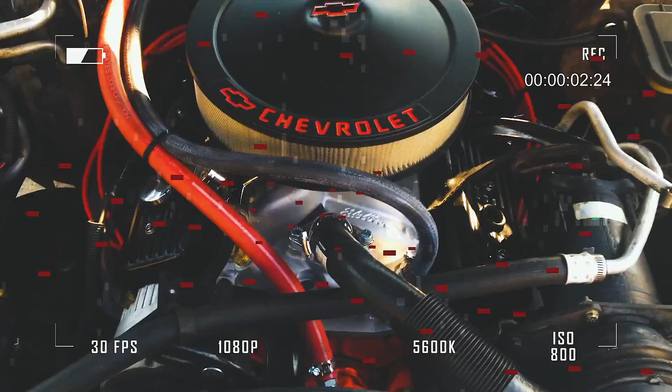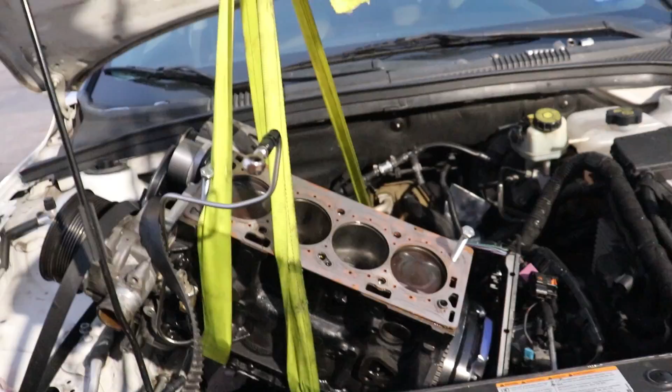We're working on getting the engine out currently. So let's go ahead and pull this out, and we'll toss our new Big Bang kind of budget built thing back on in place.

Whew, man, it's gonna be one of those late nights. I've got the engine on the stand, old engine out. There she is. We'll get her all sorted here in the future.

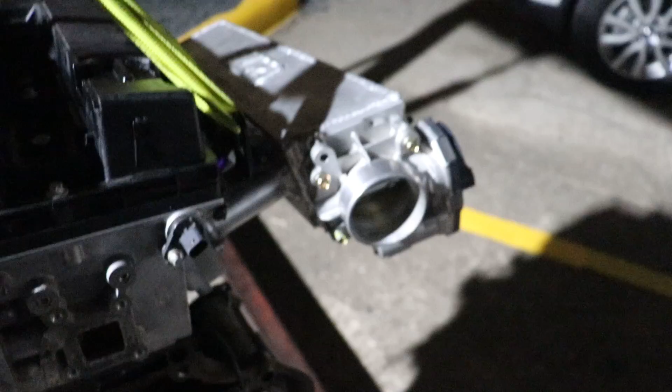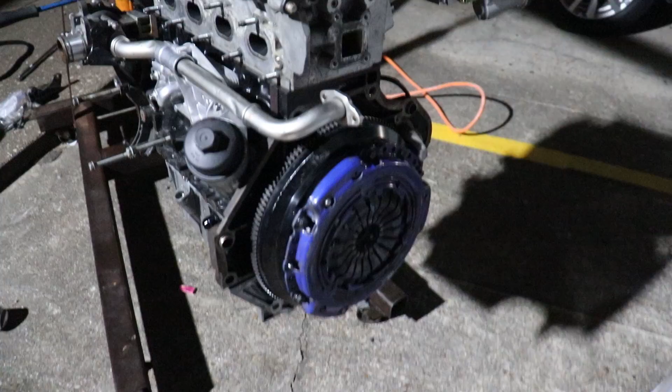We've got our manifold on along with our throttle body. Next thing I need to do is toss the flywheel and clutch on, and then we'll toss it in the car. Got our flywheel on, our clutch and pressure plate. Let's stab it on in.

Well, I got a handful of bolts bolted up to the engine. She is in there. Got our front mount, just kind of hold the front of the engine. Couple bolts where the dowels are at.

Still need to get the old block off the ground onto the engine stand and pull all this stuff in so I can call it a night. So we'll just have to pick it up tomorrow and we'll finish buttoning things up over the weekend. We'll see you then.

Ooh-wee. Starting the day off right. Man, nothing like busting yourself up working on some cars.

It is the next day. It is beautiful outside. We've got the engine in, the blocks all bolted up, and we've just got all the little small things that we need to take care of. I'll show you what those are.

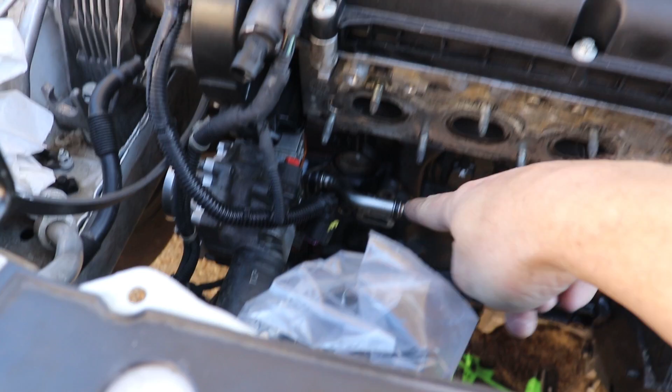One of the first things I need to do is hook up the oil feed. So I got the oil cooler out of the way. We'll hook the oil feed up.

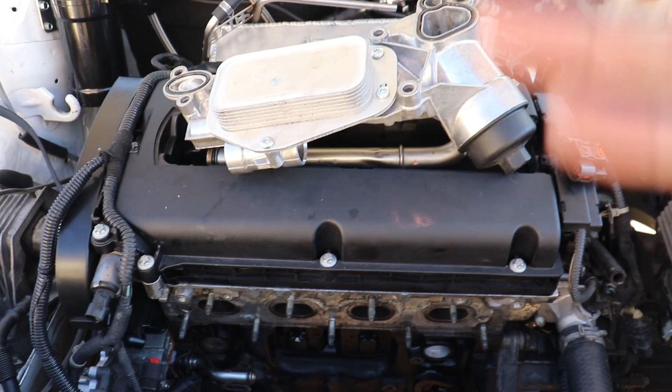I think I'm gonna have to replace the starter that came on this engine because the connections on it just aren't great. I'm gonna put my starter in it because I know it's good.

We'll toss some oil in it, take this cam cover off, we'll turn it over, make sure we're getting oil feeding through to the turbo, get oil through the system, up to the top where the camshafts are.

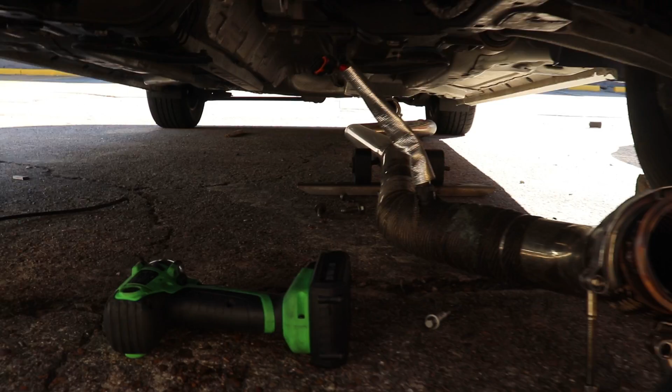Once we get that done, we'll get our fuel all hooked back up. We'll get our plumbing for the coolant, all that situated. Still need to bolt up my AC compressor, put all my accessories, plastics on, and we need to toss this exhaust back on as well. Not to mention turbo manifold, the turbo, hook up our intercooler piping, which is gonna be pretty easy. Aside from that, man, we're ready to rock and roll.

So let's get after it. I'm just gonna knock this stuff out and I'll check back in with you guys.

We've got oil coming out of the turbo feed. We got oil going to the top of the engine. So all we need to do now is toss on our valve cover or cam cover, put on our manifold. I've already got the exhaust hooked up. I just need to put the down pipe on, hook up the charge pipe, and we're good. We've got the fuel already hooked up. I mean, it's disconnected at the moment, but we're almost there.

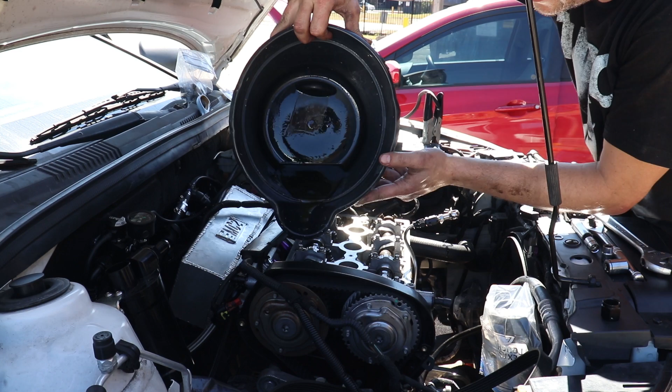Ooh-wee. Looking good. Pour this stuff back in.

Sun up, sun down, we got the engine 99.9% complete. I've had the chance to work on it all day with minimal interruptions, although what interruptions I've had today were pleasant. However, let's take a look at this.

I'll show you what's left to be done. We're going to write a startup tune to it, and we're gonna pop this thing off.

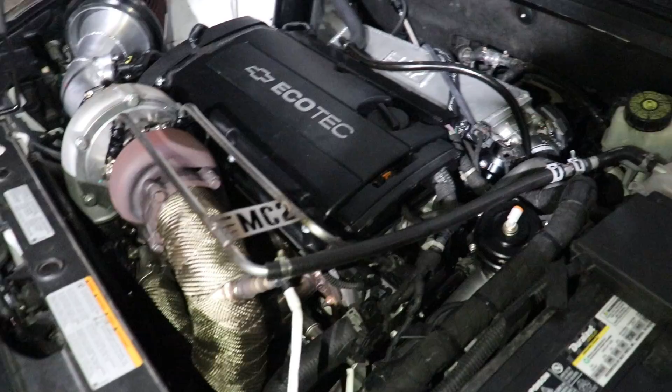So obviously I still need to put my turbo blanket on, or for the exhaust side, turbine side, whatever you want to call it. And I do have this one vacuum line over here that I need to route to the blow-off valve, but that's okay. All I want to do is fire the thing up, see if we've got any leaks.

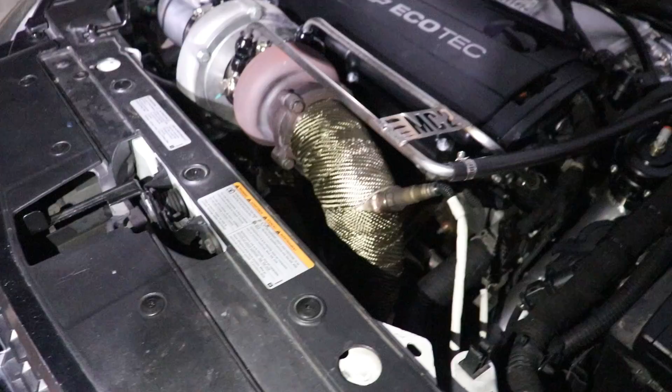We may get some leaks from these fittings here. I wasn't able to find any brass, copper fitting silly things, I forget what they're called. Been a long day, but we've got it hooked up.

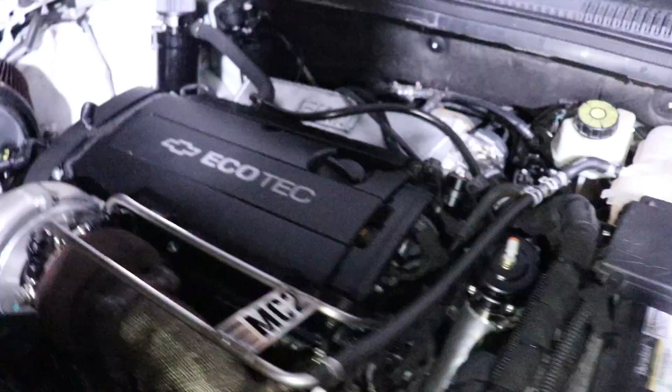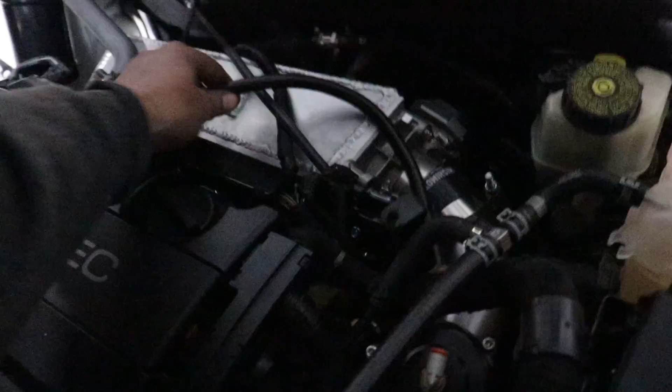Exhaust is on. I think there's one other little connection I need to hook up, but that's for the variable intake manifold, which isn't really all that big of a deal. We'll just let it complain about that. Yep, I'm definitely going to need to put this in. So we'll stab the dipstick in and we'll fire her up.

Of course, this thing wants to update. I don't want an update. Just let me write the tune.

The computer's finally finished updating, which is kind of a good thing because I've been going at it all day. Got a little something to eat, feeling a little refreshed. And I'm sure some of you guys are kind of wondering and have asked to see some of the tables, some of the stuff that I'm doing. I'm just going to give you a little bit of a brief overview of what it is I'm doing tune-wise. This time it's going to be a little bit different.

We're doing VE tuning. I was trying to do MAF tuning, in which I was using the mass airflow sensor to tell the engine how much fuel it needs for the air. However, we're going to do speed density, or VE tuning.

So I'm going to show you some of the tables that I adjusted and what we're doing to get this thing going. I'm not going to do a tutorial on how to put it into speed density just yet because I'm still kind of learning some of this stuff. But we essentially changed it over - one of the things we did is we increased the engine speed from 400 to 6400 to 8200.

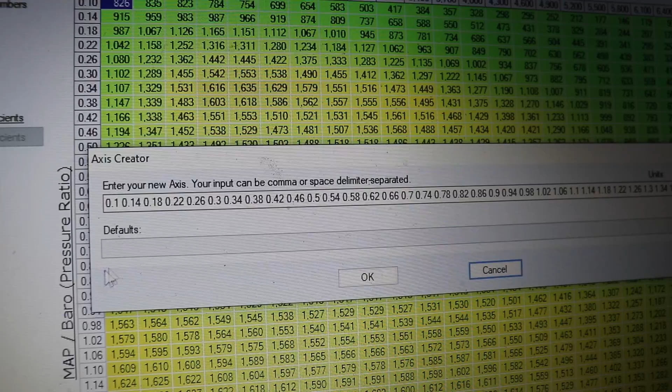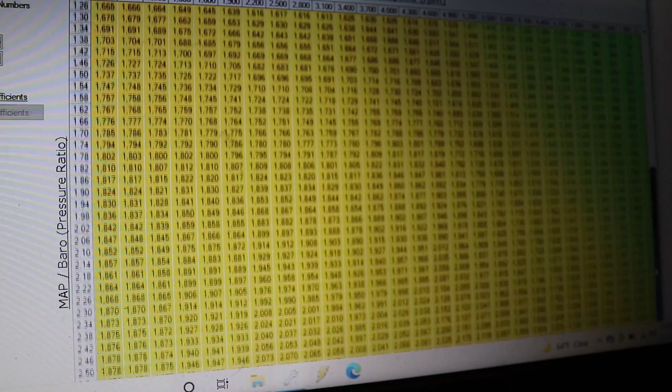That's one of the changes we made because that's where we're going to cap out. The other thing we did is we changed it from being 1 bar, or just kind of atmospheric pressure, to 2 bar, which will allow us to get up to about 28 pounds of boost before we start running out of map sensor. And I adjusted the VE table accordingly, added some fuel. So we'll have to log all that, see how it does. And this is what it's going to run off of here.

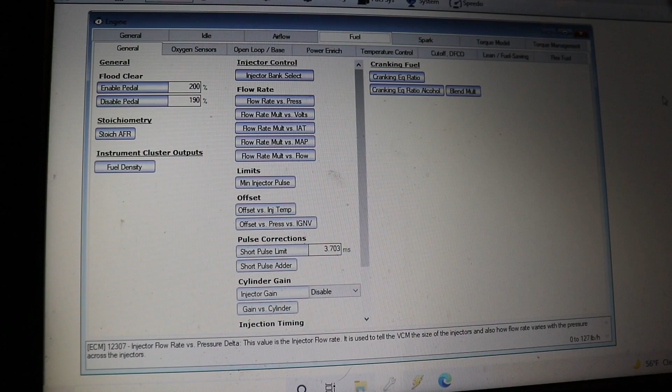Okay, so some of the basic changes that I made - the main thing was characterizing the injectors, in which we changed our flow rate versus pressure. The great thing about injector dynamics, they provide all this stuff. So we changed all that - our minimum pulse width, flow rate versus pressure, our short pulse, power enrichment.

I changed this up as well so that way it will kick in. The ramp-in rate, I increased this quite a bit. I maxed it out basically so that way it'll just kick in immediately. I lowered the required throttle position. I believe it was at like 85%, so we took that down about 10%.

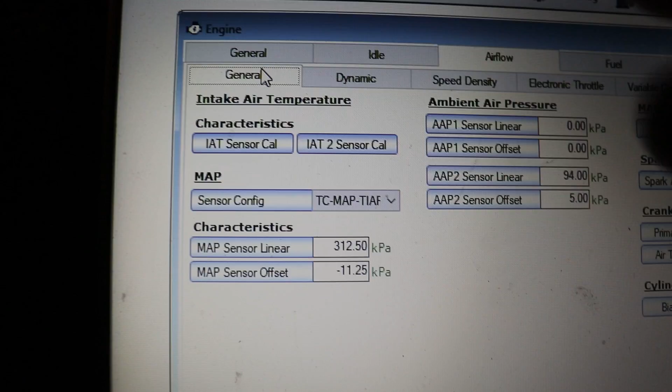It is currently in speed density, in which we've disabled our MAF sensor and it's relying on speed density. I did have to change the characterization of the map sensor since we do have a 3 bar map sensor in there now.

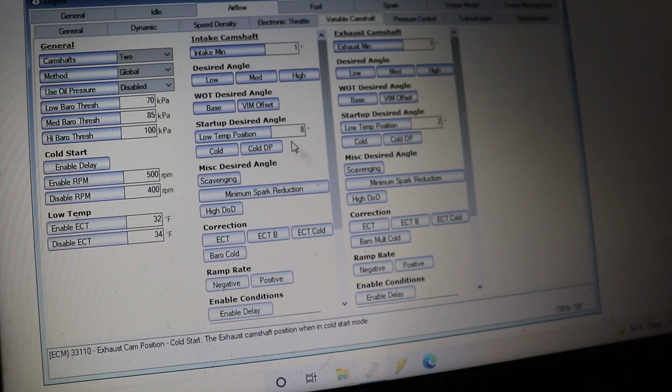Under variable camshaft, I essentially turned off the VIM, which is variable intake manifold. I just zeroed all that out. We'll go and play with all that stuff once we can actually get to a dyno. Same thing for the intake - we got intake camshaft, exhaust camshaft, there's VIM there.

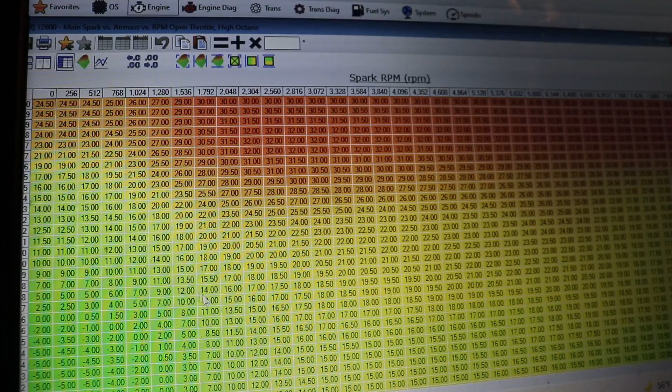And then last but not least, I went into Spark, and for my high octane, I really lowered - this was in the 40s here - and I really lowered that down. I pulled a lot of this down, maybe even 10 degrees, just to keep it safe. The high octane is basically the same as the low octane. Pulled out quite a bit of timing there.

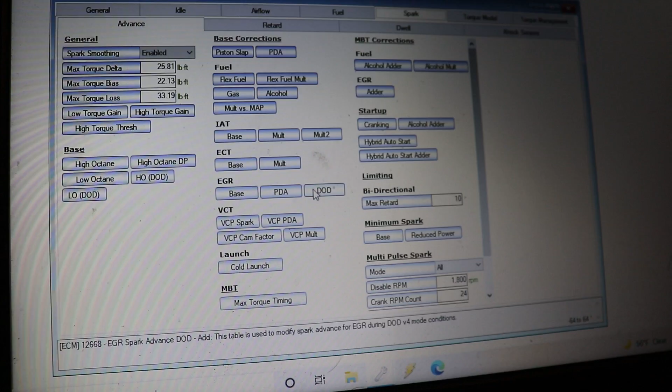And then any kind of modifiers here that will mess with it, like our intake air temperatures, I just zeroed all that out for now, just to keep us safe. Same thing with engine coolant temperatures - I just leveled all that stuff out because these are all just multipliers and I don't want it fussing with it. We can always go back and add this stuff in, but that's essentially it - the map sensor characterization, the fuel injectors, and then we just made it safe for the timing.

So let's go ahead and we'll write this and then we'll see if she fires up. All right, we got her tune wrote on the car. I'm gonna set y'all on a camera stand here and wish me luck.

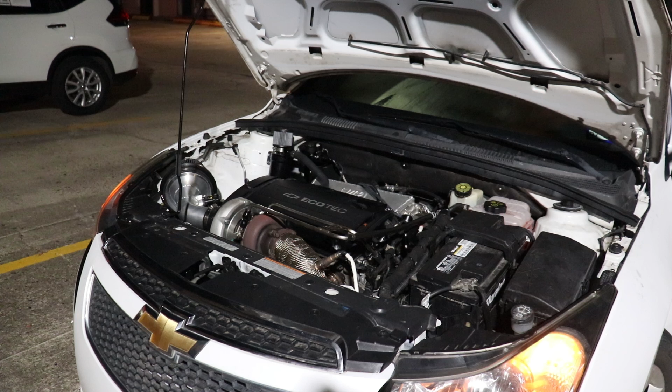No, not the battery. All right, battery's a little weak. I'm gonna hook it up to Shannon's car and we'll give her another try. All right, let's try that again.

All right, we're getting there.

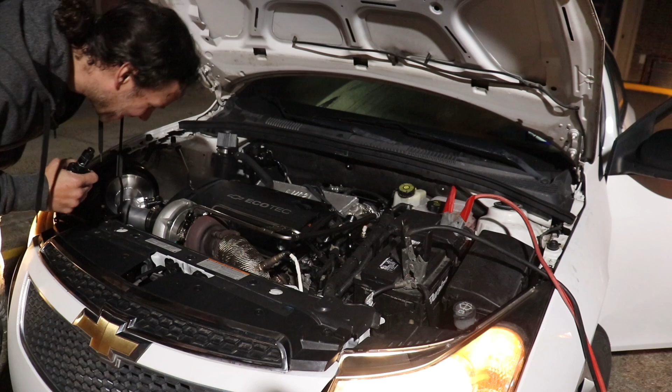Looks like we got ourselves an oil leak. All right, we have to take care of that. I got my lovely assistant in the car here. You remember how to press the clutch and turn the key? Yes. Okay, that's what I need you to do, because I didn't have the turbo feed completely tightened, and this thing made a huge mess. Let me know how to do it. Go for it, and I'll tell you if you need to stop.

Stop, stop, stop, stop, stop. Okay, hey, you get off the car. Ooh, to me, it's a lot of oil. Oh, damn it. Well, she started.

We got the engine in. Positive note, we've got the engine in. However, I think I did cross thread the oil feed. Not a big deal, we'll sort it out. She's in there, and there's so much oil on the ground right now.

This is why having a second hand definitely would have been a big help, because I could have stopped and not let the thing piss out as much oil as there has been. Look at this, that is a lot of oil. A little too much for this thing to be running that long, and all that oil just go pissing out all over the ground.

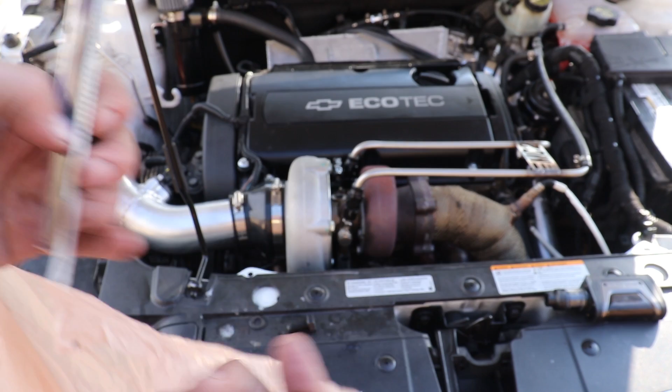Went to the hardware store, kind of dug through some of my stuff. We have this that was supplied by Maxpeedingrods at some point for one of the turbos, which is an oil feed bolt. We're just gonna drill and tap it for this bolt, which is larger than what it was currently tapped for. The other bolt was only grabbing on by a handful of threads. This is slightly longer, so I got a drill bit and a tap for this larger oil feed bolt here.

So let's drill it out. We'll tap it, we'll use some grease to keep the shavings to a minimal that would go down in the pan. So let's get after it. Got this thing dipped in some grease, so let's go ahead and drill it out.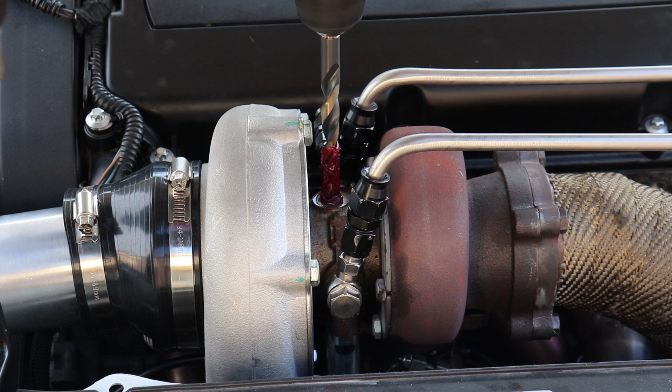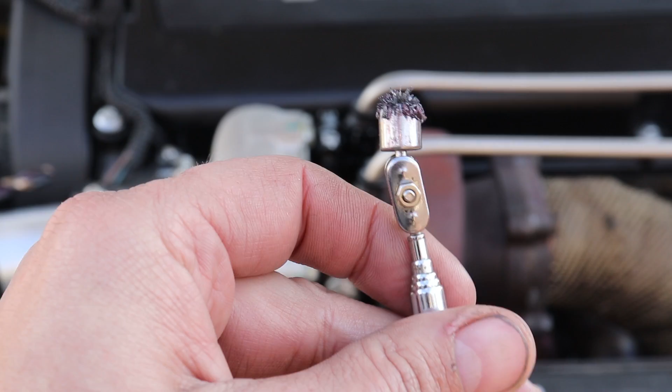Oh, come on. Yes sir, I think this is gonna do it. And I'm just taking my time with it, catching all the metal shavings I can. Same difference with the tap. Let's go ahead and thread this thing in.

Sure did get windy, but I got everything hooked up. I just got the turbo blanket kind of tossed on there for now. Still need to toss on the springs, take care of the vacuum stuff, but let's see if we fixed our issue. Fingers crossed, let's go.

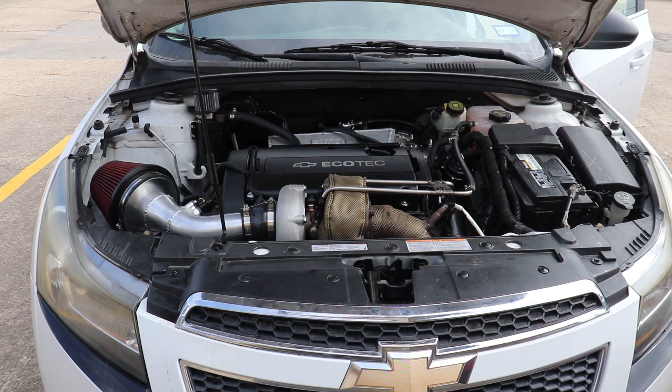Don't see anything leaking yet. Well, we're not leaking oil, so that's...

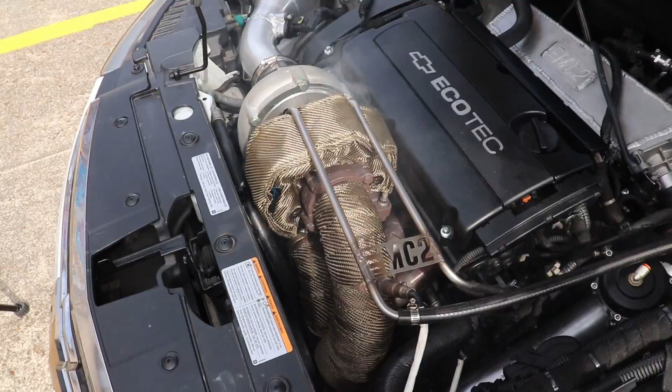All that oil, just get rid of it. See if we're actually leaking anything else. Oh man, look at that, ladies and gentlemen! No leaks, aside from that one big issue.

She's running. Need to fix that, but we'll just kind of let her warm up, burn this crap off. We got ourselves a barbecue going here, folks. We'll just keep an eye on it. Belt's not squeaking, that's fantastic.

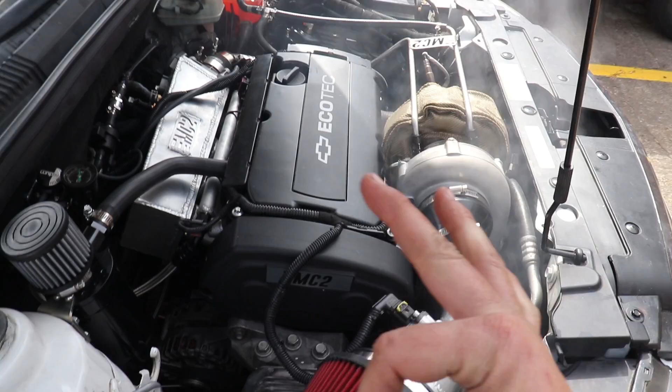Might need to increase the fuel pressure.

Don't you start chirping. Oh shit.

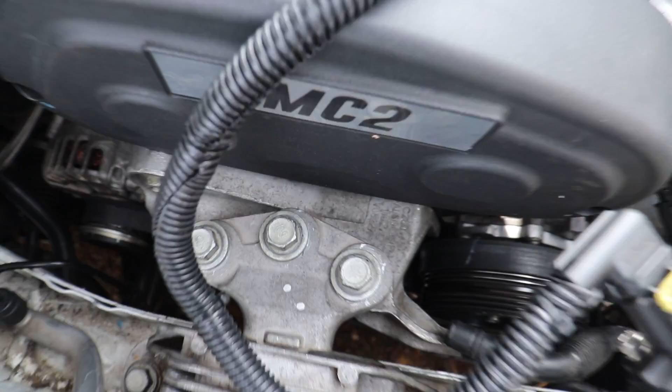What the hell? Why is this belt riding up like that? Come on now. Alright, so it looks like we need to adjust our belt. We're just gonna have to get another belt. Not that big of a deal, but let's see what she's doing oil pressure wise.

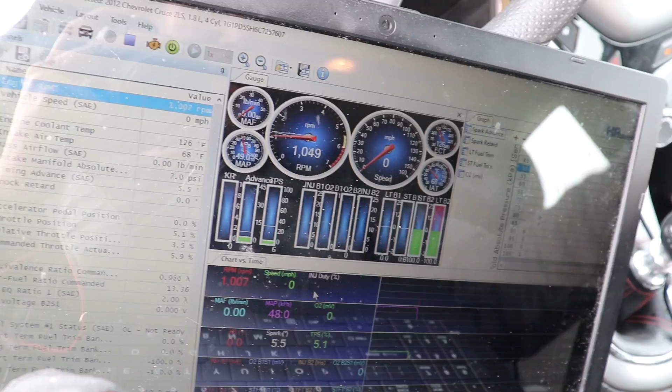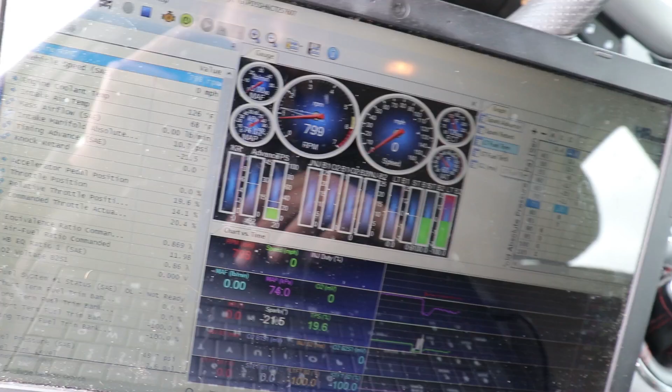Alright, that belt's already chewed up, but let's see if we can't take her for a little bit of a spin. Up. Come on.

She definitely idles a lot better. Take her for a little bit of a spin-a-roni. See how she's doing.

She's really rich, which is fine. Don't got anything too crazy going on.

Yep, we're gonna have to sort that idle out, but see if we can't collect some data here.

Well, we got her driving. We just need to figure out this whole situation with the belt. Everything seems like it's going okay. She starts up a lot easier.

Let's see if we get anything flying out. Ah, shit, of course. We'll get that all situated.

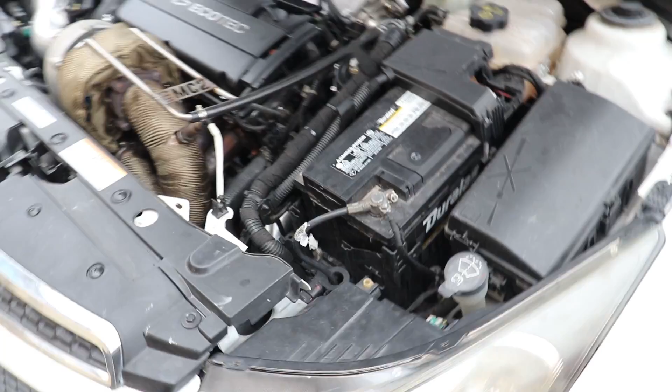Man, I'm pretty happy about that. We toss a little more water in now that she's kind of got up to temp. Not a big thing though.

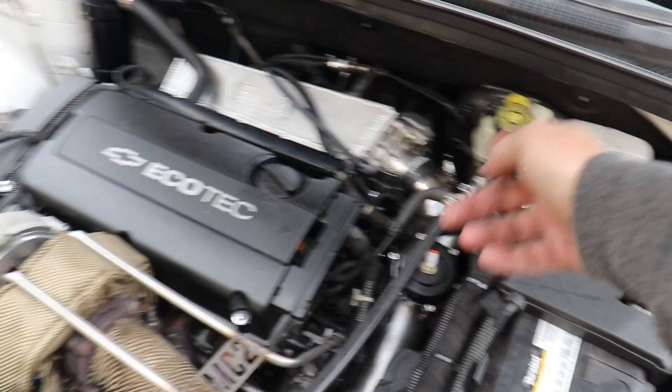I got the belt all situated. I'm just kind of increasing the idle and rolling RPM at the moment. Belt took me about a good 10 minutes to change out. Got a fresh belt, AutoZone hooked it up with the 1-year warranty deal. So, also make sure I torque the bolts on the pulley over there to spec.

Hopefully that'll do it. Lost a lot of my settings when the system upgraded. Kind of lost its link, so let's see how she does.

Like we're getting our data in the proper areas. Kind of fat in some spots. A little lean in others.

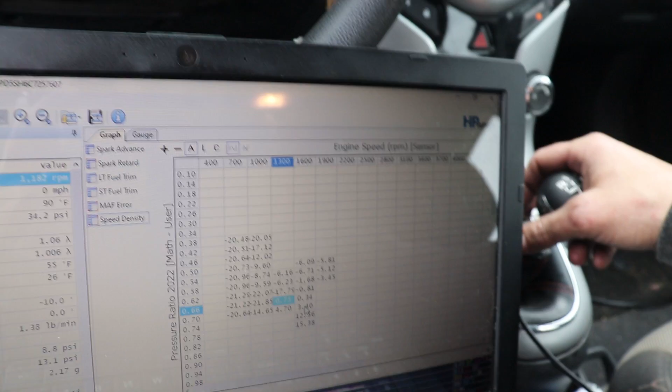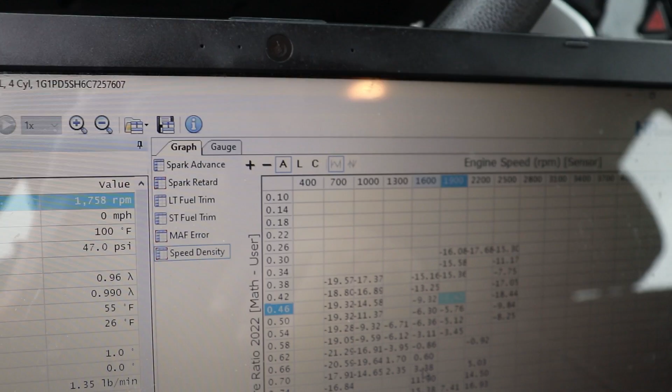Hopefully I can get this thing just to idle fine for a sec. The whole cold start stuff.

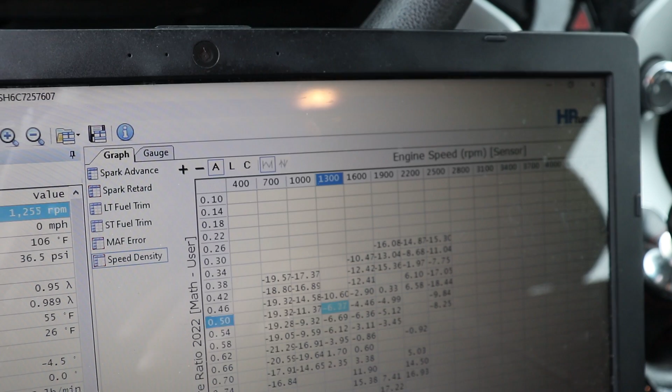Alright, she's idling. I stopped the log just in case it was gonna die. Good.

Well, it's wanting to do the same thing. It's just kind of wanting to ride up. We'll have to worry about that another time because I'm just gonna have to pull that water pump.

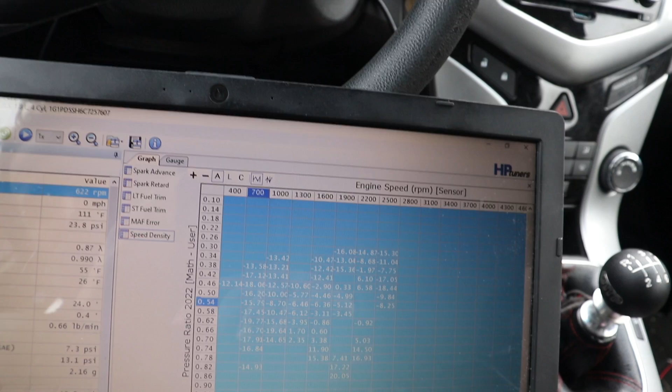So I'm going to take what data I collected and we're just gonna move over to our tune file. We'll go over to virtual volumetric efficiency, and I'm just going to do these in half steps.

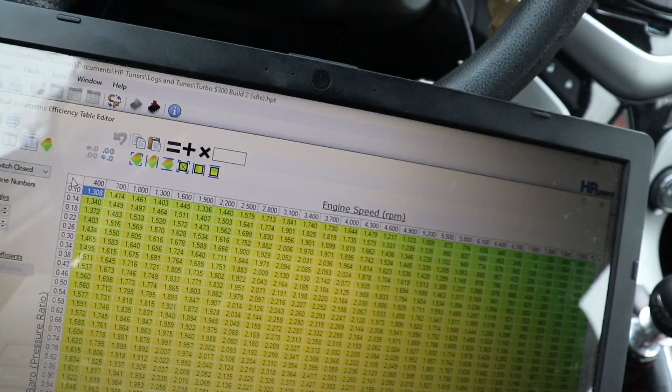I'm going to right click, paste special, multiply it by half, and we'll kind of blend some of the stuff out.

That's going to be about it for now. We'll copy that. Calculate coefficients. We'll go over to

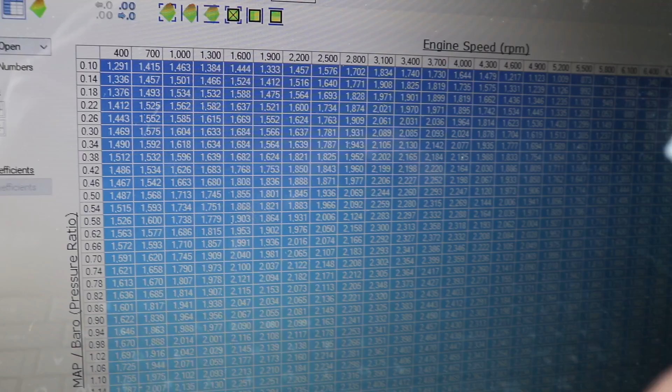our manifold open portion here. We'll paste that, calculate the coefficients, and we're just going to kind of rinse and repeat that same kind of thing until the fuel looks good, and we'll just save it as a new version. So we'll save this as version 3.

And we need to go get some E85. That should get us far enough with that busted up belt.

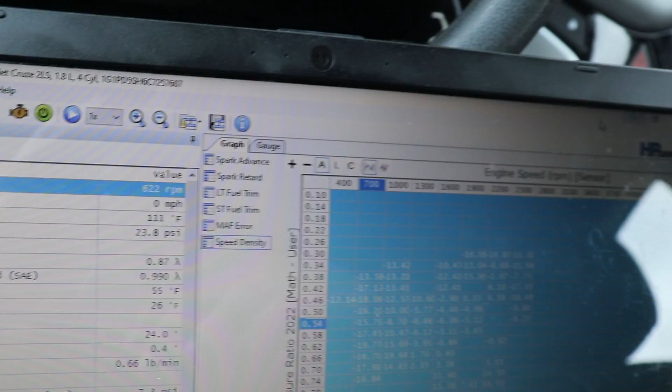Alright, so I'm going to write this tune and then we'll go for a cruise. Alright, our vitals are looking pretty good.

Apollo is coming along for the ride. We just need to put some gas in the car. And we'll do a little more tuning over the weekend as things progress.

We'll see what kind of trouble we can get in Apollo. We'll see what kind of trouble we can get into.

Alright, I'm going to turn this off. I'm going to do some driving. And we're just going to keep on working on tuning until we can get this belt situated and make some boost.

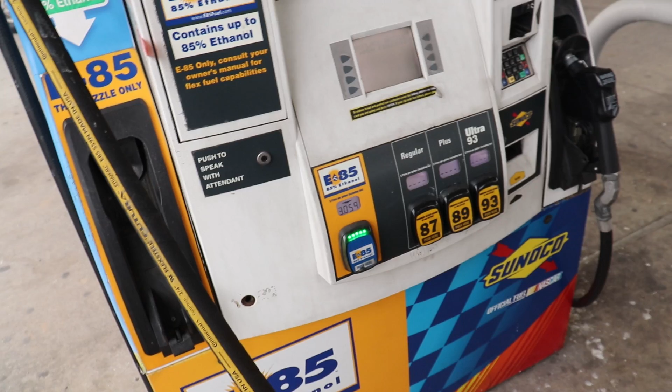Toss a little bit of that E85 in there. We'll get back on the road. Isn't that right, Apollo?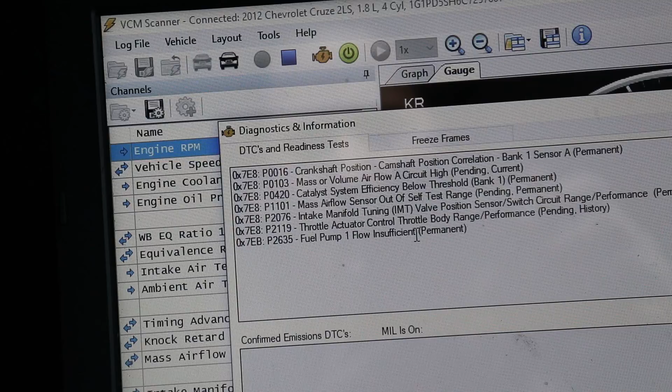Aside from the annoying belt, our DTCs are codes I'm pretty much aware of. Aside from the fuel pump, I did lower the pressure, I might just take it back up to stock, we shall see. The crankshaft position correlation is just a permanent one from the last engine, that'll eventually go away as I drive more. Mass airflow, catalyst, mass airflow in the intake, the variable intake, that's all stuff we've kind of deleted for now. And the throttle actuator control is just because we got a different throttle body on there.

But let's try and make a little bit of boost. This belt's either gonna hold or it's not.

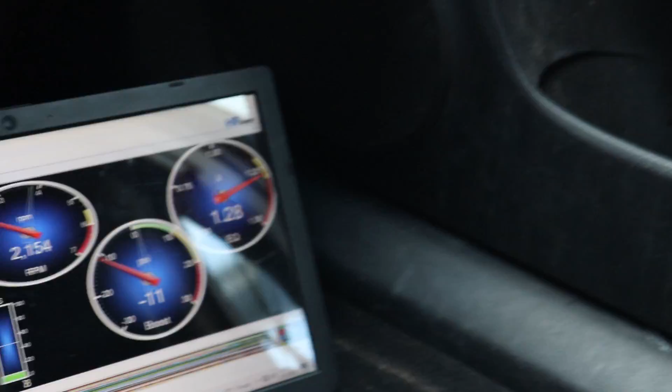Let's have ourselves a little bit of fun. I'll see if I can't figure out a way to, maybe I can toss it into second gear or something like that, and we'll have a little fun. I'm gonna have me some fun. Alright, I'm gonna put this thing into second, and we're just gonna rev it out and see what it does.

Holy crap! That was awesome! Oh man, she pulled! Oh, that was fun!

I'm gonna go back in, take a look at the log. I don't want to do that too much until I can go back and look at the log and really concentrate on what I need to adjust. So I'm pretty sure we just hit gate, which is right at about 14 pounds of boost.

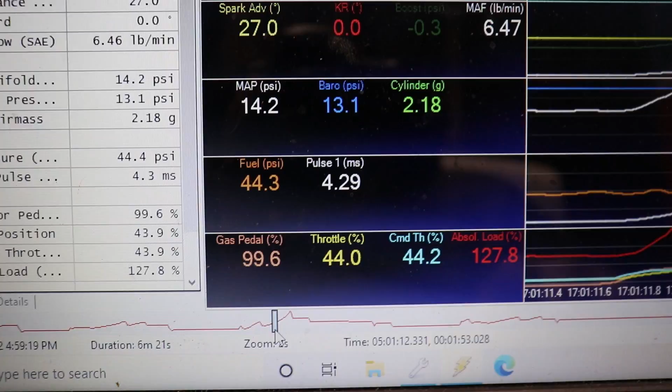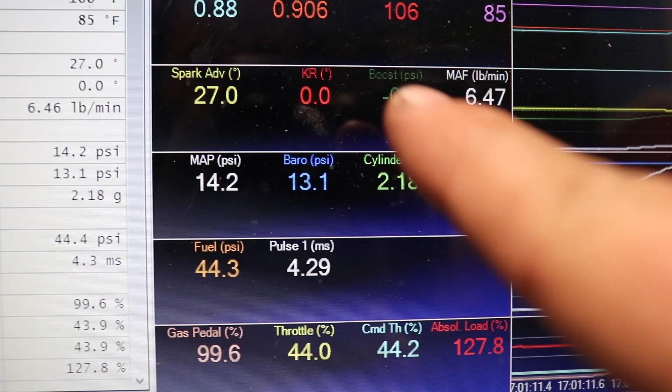So here's the beginning of that quick little run. When I put it in second, right there is where I had the gas pedal all the way down. We'll have to fix this because it's not opening all the way, I don't know, it could be the throttle body, but we'll sort all that out. And it's a nice gradual ramp, and here's the boost in the green. Here's my knock retard, spark advance.

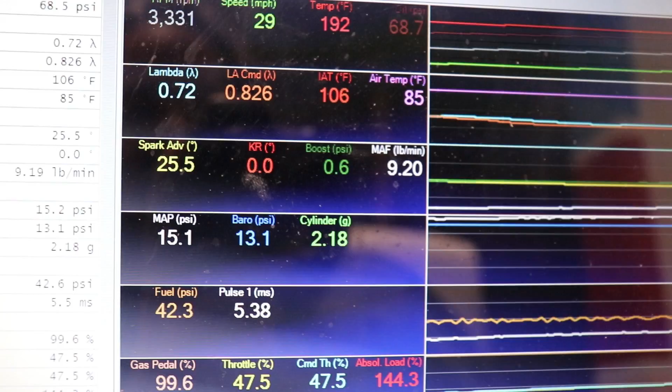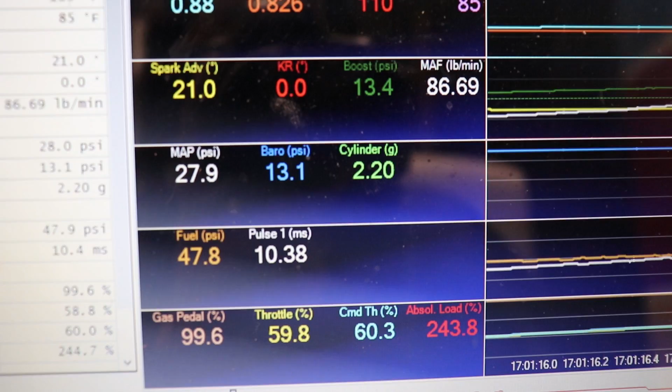Here's our lambda commanded, and we were pretty safe. Check this out, watch, it's a nice gradual ramp, you can see it right here in the green. Went past it, but at 6,500 RPMs we peaked out around 13.4 pounds of boost. We didn't have any knock retard, total of 21 as far as spark advance goes. Lambda wasn't too bad, need to toss in a little more fuel.

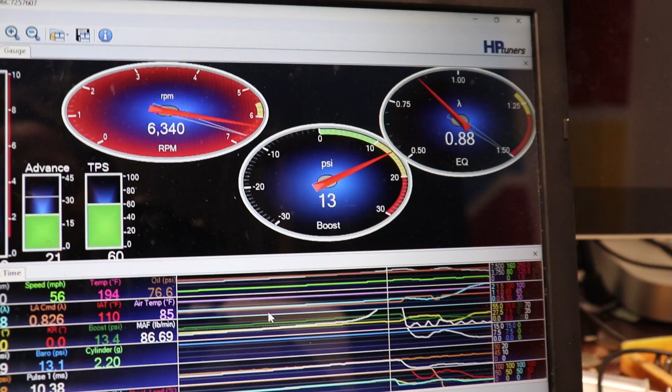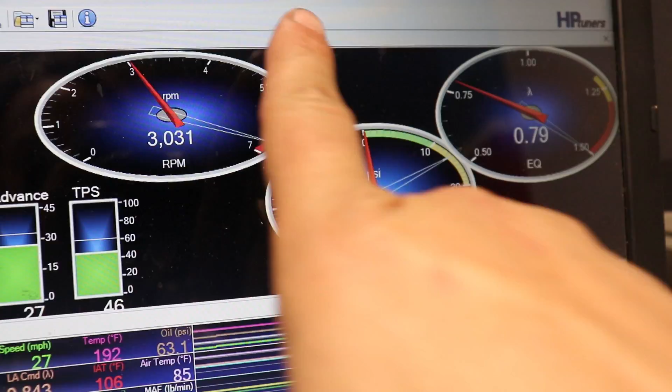But let me show you this with the gauge view up here, because it might be easier to understand. So here's the beginning of our run. As it goes, you can see our EQ ratio was in a good area, we kind of need to keep it here just to keep it safe. Timing's pretty conservative, and it was a nice gradual climb, and then it just kicked in right at about 5,000.

And this is just on gate. I still don't have any of the plumbing for the blow-off valve hooked up, so I'm interested to see what it will do. I'll work on that tomorrow, but just wanted to get it up and driving again. It just gradually ramps up and then just hits hard.

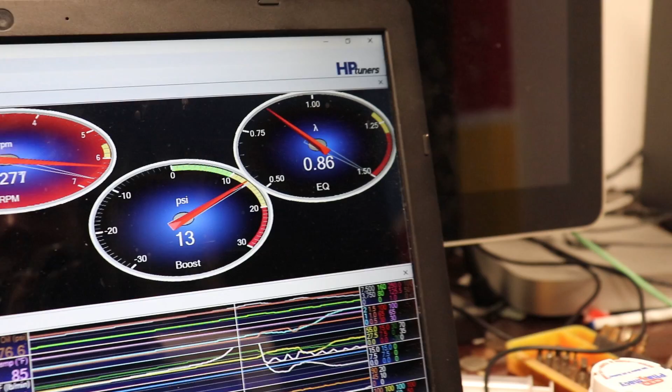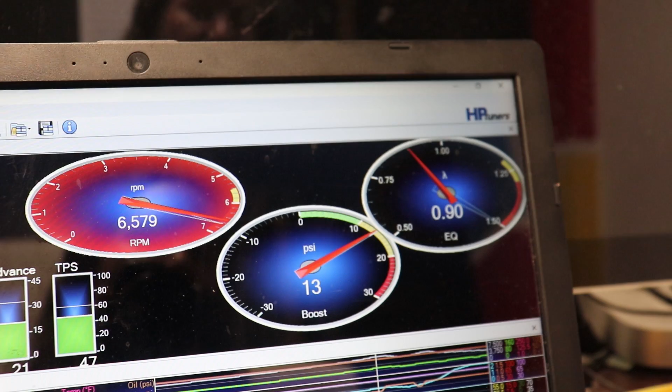What's that? Are we gonna go to the movie theater? Yes, we are. Oh, when, Dad? Soon, as soon as you stop bothering me I'll be able to look, I'm trying to finish something up.

Yeah, but it just hits pretty hard. I plan on carrying this thing out to 8,000 RPM, so.

That's awesome, yes, we got it running, we're finally hitting a little bit of boost. I'm gonna tweak a few things, go back and look at this log, make changes, hook up the blow-off valve and everything else, fix the pulley because it's already eaten up that new belt, probably just need to change out the water pump. But the engine is running great, it's running great, we've already tossed 13 pounds of boost at it, and it pulled awesome.